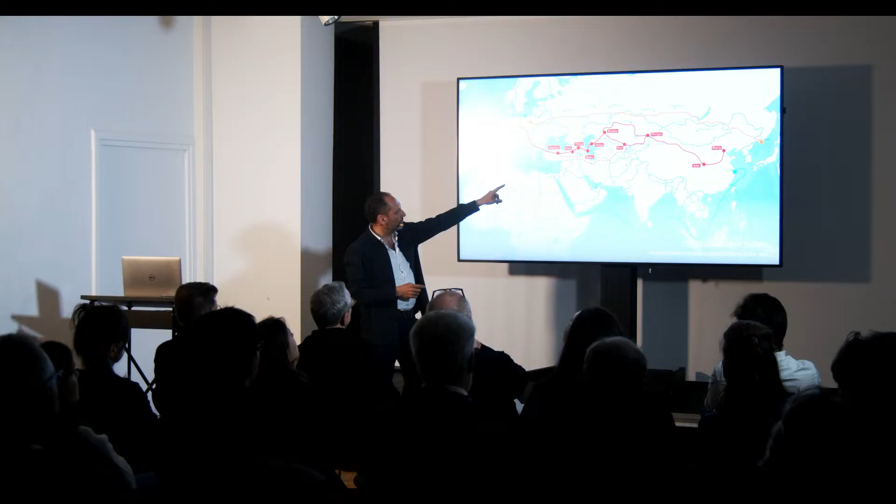If we look at other countries, China is at the moment very much focusing on the new Silk Roads, as they call it. The connections over the oceans, the little gateway at Singapore and so on. China is very much focusing on developing a new landline through China, but also through Kazakhstan, Uzbekistan, Iran, to get a landline connection from the Far East to Europe. This is a game changer. What happens is not only that some toys from China end up in Berlin, but on the way, all the cities are also connected to these two big cultural entities or areas. That's why there's so much change and economic growth at the moment.

Iran is kind of a complicated partner here, as everybody knows, but in all the other countries there's a lot of development going on. If you go there, there's Chinese tourists, Indian people who run through the streets of Almaty in Kazakhstan. It's great. These connections and the possibility for people to meet and exchange ideas and goods, that is what cities depend on.

If you look at what that means for cities, traffic, circulation and mobility issues dominate how our cities look today. In some areas, infrastructure buildings like train stations, parking lots and tram stations occupy a large chunk of the cities of today, and this will even grow. The passenger demand for Germany will double by 2050. Imagine that - the passenger demand for ICE trains, they are not punctual today, so what will happen in 2050? There's a radical new thing to be developed.

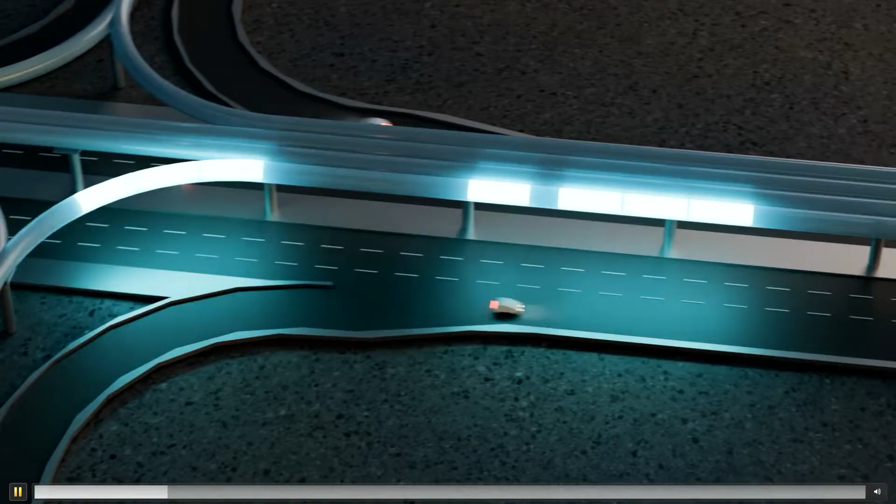So this is what these capsules at the end of the day will probably look like, but maybe more interesting is for you to understand how it works. We've done a little movie to explain how the system works, because it's based on single capsules that you board somewhere where you are. Then these capsules find their train at some node locations, and then they speed up and run super fast.

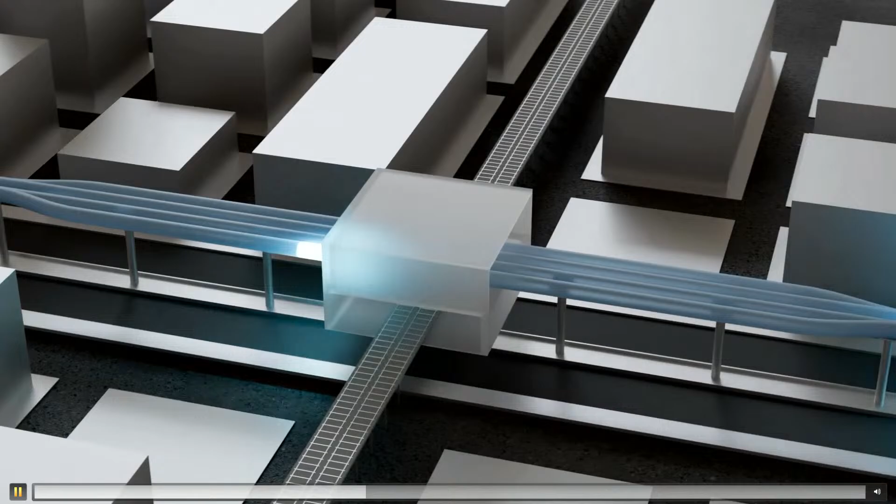The next question, of course, is how do you get off the train? Because people have different destinations, one of these capsules will slow down and take a detour, and you can get off and switch to other modes of transportation. So that's the whole system - it's based on never-ending, always-running trains that you hook onto or detach from while driving.

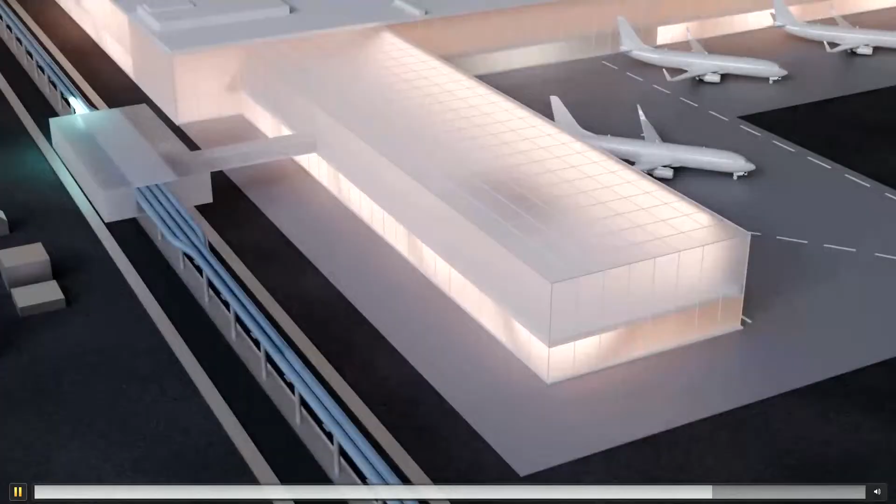We're also studying what's going to happen around a station where you stop - of course the real estate value goes up, and new possibilities for development of suburbs and cities grow all around these stops along the way. At the end of the day, this might be the most appropriate way to connect fast flight connections, the long haul flights, to local transport, and to connect even cities that are not very well connected to airports, also to the flight networks of the future.

So what we're doing right now is trying to help the technicians think about the atmosphere and these locations where you board, and how they're connected to other modes of transportation. But one aspect here is interesting - we're looking at the third dimension of mobility. That's why I was so interested in the last group that presented. I very much believe in the third dimension, as humanity has already discovered the subway, so the connections in the ground.

That's the third dimension down, but the third dimension up has only been celebrated by Wuppertal and some other few locations on this planet. And I think we need to address that.

One company that does that is Volocopter. Maybe you have heard of them. They are one of six competitors trying to come up with taxi drones, electric vehicles transporting two people at a time, super silent and easy, hovering in space. In the first place probably mostly emergency connections and touristic uses, but in the future this little vehicle will replace all the super noisy, loud, dirty helicopter traffic in the big metropolises of the world. So the question is, how do you enter these?

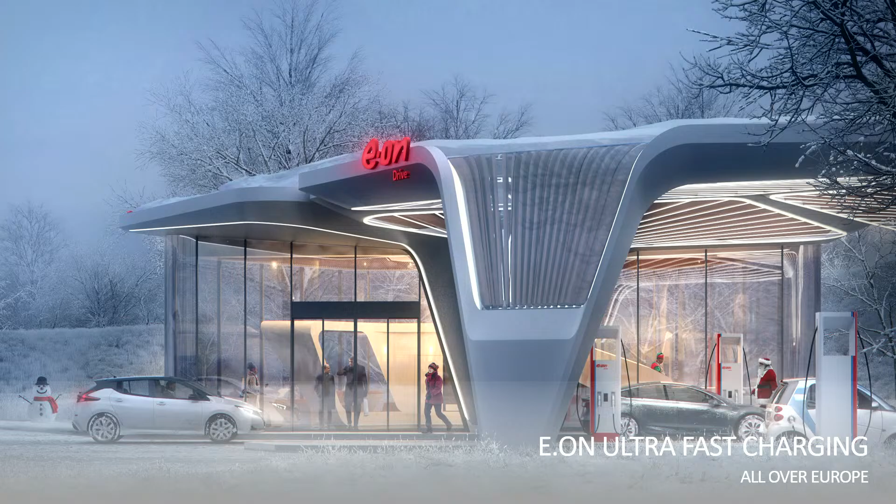These are the first designs for the fast, ultra-fast charging stations of E.ON that we did quite some time ago. Some architecture for Volkswagen in Wolfsburg, where people pick up the car they bought, where Volkswagen staff explains how to use the car and so on.

So, locations of transition. I've also included some projects by other people to underline and explain what I'm talking about. This is a project most of you know from Ingenhoven, with so much criticism and skyrocketing costs. But at the end of the day, similar to the Elbphilharmonie, people will be fascinated by the fact that places we long thought would be just functional spaces where you get off the train could be fascinating spaces and fascinating pieces of architecture.

And if you look at other cultures, it's crazy what's going on in Saudi Arabia. It's crazy what Hadid, our friends from Hadid Studio in London, are providing at the moment. It's just proof that architecture for mobility, for the way we move in space, is becoming more and more important.

And we were lucky to find Max Bögl, a big company focusing on prefab concrete elements, but also very much on street construction and bridge construction all over Europe, a big construction company. They were part of a big consortium to develop a high-speed magnetic train some time ago here in the north, in the Emsland.

That experiment stopped, and Max Bögl was the only company that insisted on continuing and pursuing the same idea. They have now been working 15 years on coming up with a magnetic train concept with a super holistic approach.

The company is providing 12-meter long pieces of tracks with the magnetic technology incorporated. They will be providing all the stations. They are also supplying the cabins, the wagons, the train itself, and also the operation for a system like this. So if you go to Max Bögl in the future, compare to what the Deutsche Bahn is doing, where you have one company that's doing the ground, and the next company is building the tracks, and the next company is providing the trains, and the next company is doing the operation, which makes it super complicated.

And the result was not only the track design, but also, of course, the stations made out of modular components, biomorphic kind of design, because we believe that this is very much representing new modes of transportation or ways we move in space. And it's all modular, can be prefabricated and brought to the site and implemented super fast. So if building a train like this takes only a third of the time of a subway, it only costs a third of a subway.

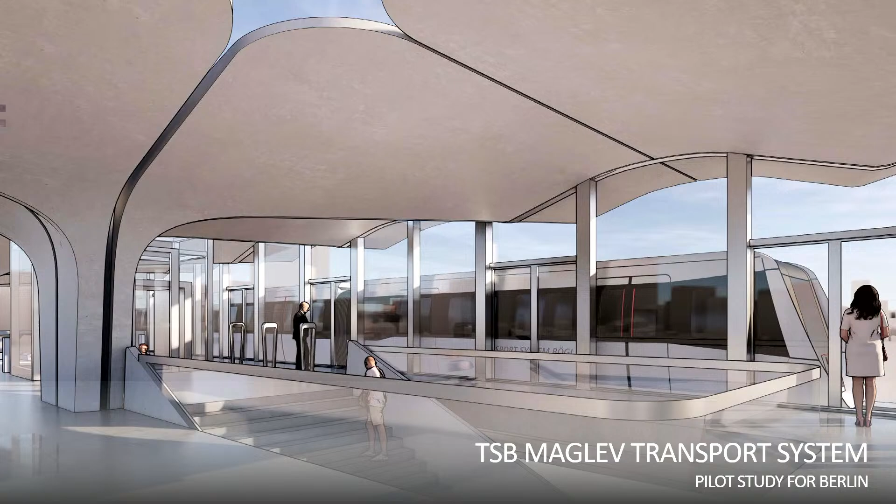I sound like a marketing guy, right, talking about these things. Okay, let's go to the design. So we tried to show how it would look in the urban space, and I think these drawings show very well that it can be easily implemented in the urban fabric and urban spaces.

For me, it was super fascinating to really focus also on the engineering part. So we needed to come up with an intelligent solution for the need to adjust to all kinds of angles of the track in the curves at different locations. And at the same time, the two tracks needed to be adjusted in height to always provide a horizontal emergency track in the middle.

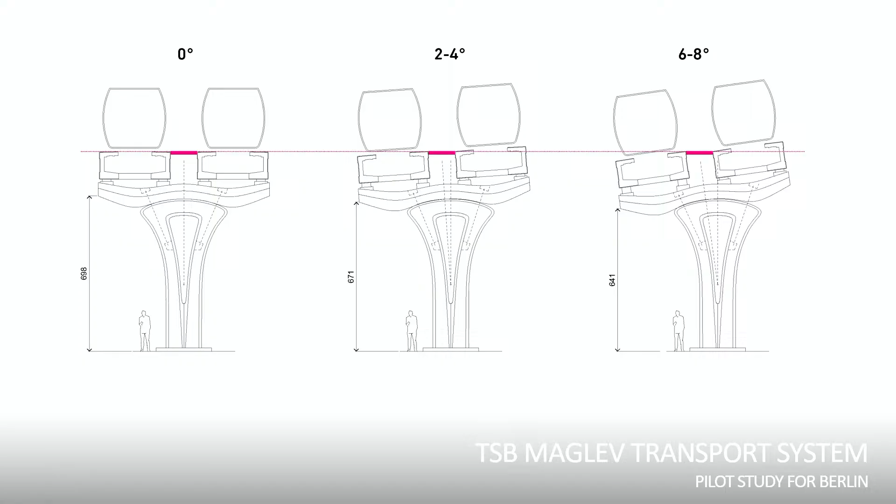That's why we came up with this interim layer that sits on a pillar, on a column, but allows the whole thing to turn slightly to adjust to all these necessities. And of course, that works very much like some areas in our bodies, how some bones work in our system.

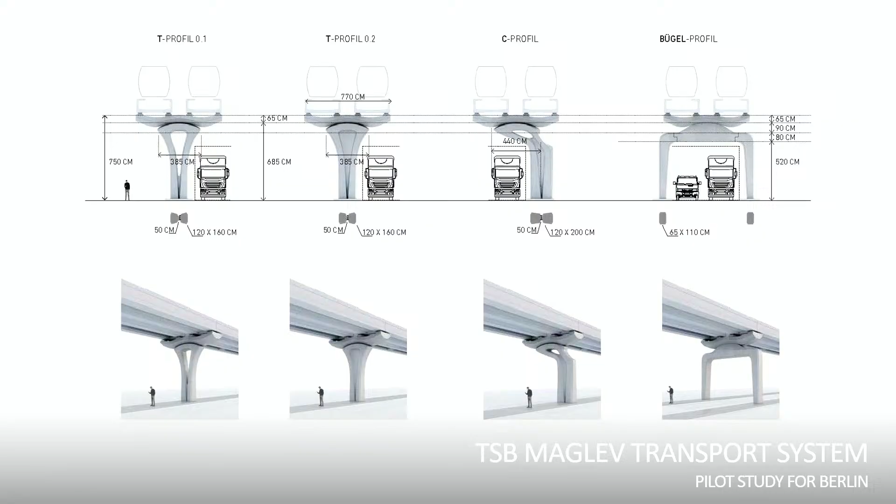And then we had to come up with all these different solutions for different site conditions, like cantilevering parts, bridging, subconstructions, and so on. But even more important was at that point also to show how the system would look within an urban environment, like a typical Berlin road, for example. So you see how these columns can react to different site conditions.

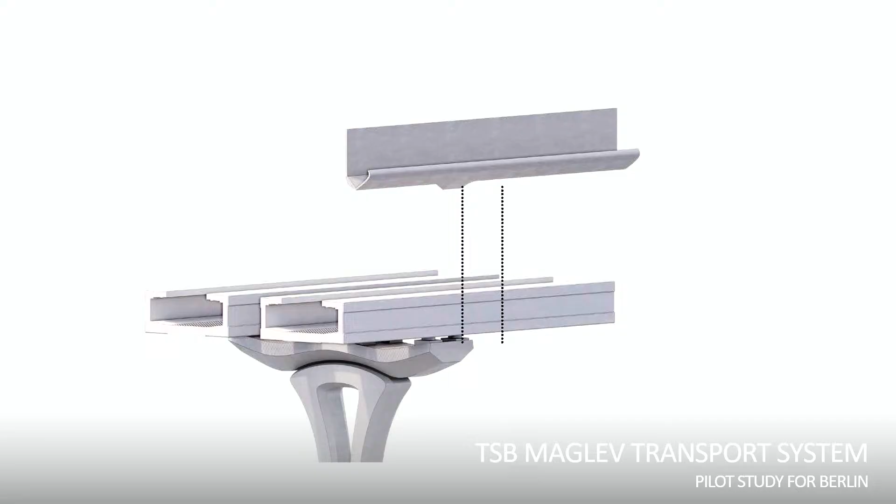In addition to the structural and engineering intelligence, we also thought there should be some additional element to the tracks, so it doesn't look just technical, so it can be of different value also for the urban space. So one idea is to combine it with solar panels, photovoltaic area that generates the energy that the train needs to run.

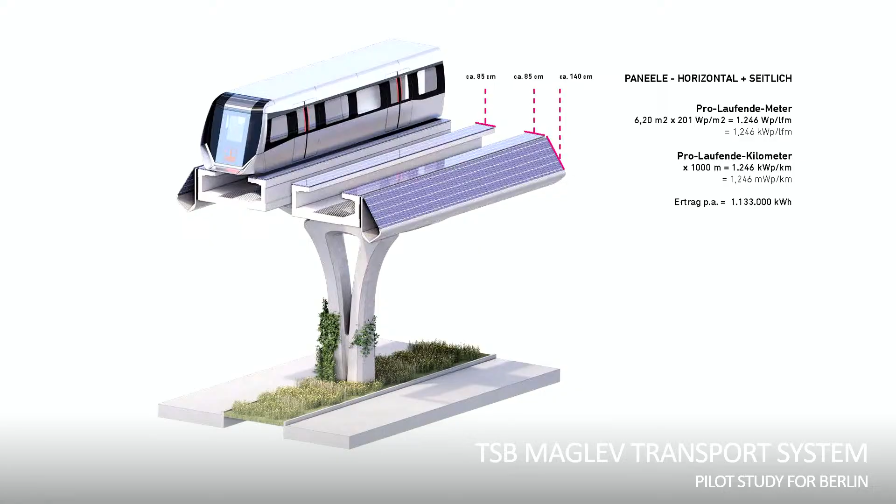And believe it or not, we did the math and calculated that the surface, if cladded like this, would help us generate nearly 50% of the energy that the train is using for its operation, which is crazy because it's a synergetic aspect that your track and your mobility coach, the train and the tracks, are at the same time a little power plant that reduces the amount of energy that you need to bring into the city from networks or power plants.

At the same time, a second idea was to also provide some body of earth to allow plants to grow along the tracks, to allow for a green element that is not only nice in the urban space, but also to collect the water, to store the water, and to cool down the space.

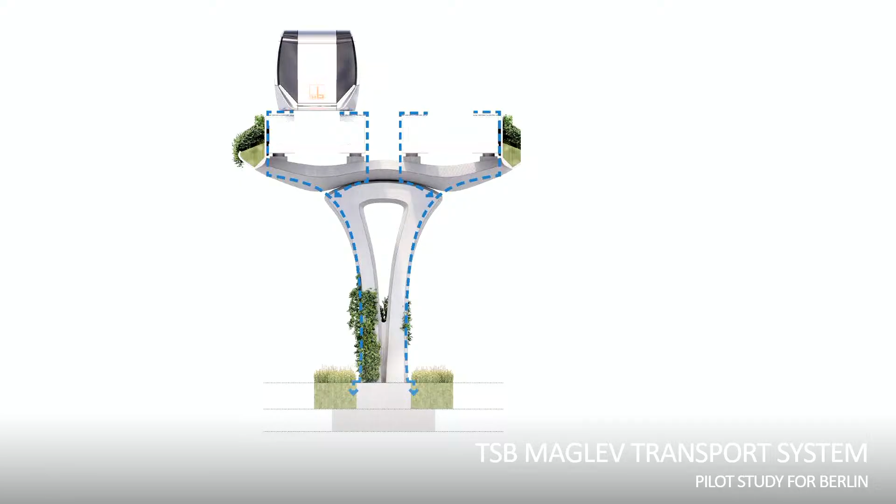So we came up with some strategy to collect the water and make it run down into the ground. Of course, if you lift up tracks like this, you free up a lot of space on the ground, and so you can allow a sponge city, that somebody talked about today, to also arrive in the middle of our circulation areas. But at the same time, of course, to keep some water up in the air to cool down the space below.

During the year, you would see blooming cycles, and people could then decide if they would like to have more the lilac or the rose line. So that would not only be a name, but a reality.

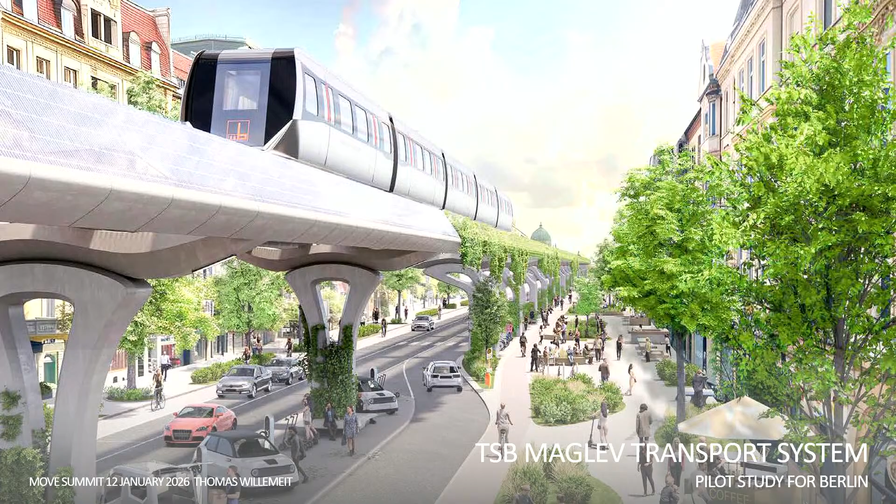But even more interesting is if you think about this in a consequent way into the future. We believe we need to look very closely and carefully at the ground, the urban public space that we have. If we free up space by inhabiting the third dimension, and by reducing individual mobility on the ground, then something like this can happen: you free up space for much greener areas, areas for kids, for people together. Going back a bit to the 60s and 70s, the idea of the city was a green city with buildings sitting in the green. But all the public space was more and more occupied by streets and parking.

So I think there is a little movie. I don't know if that works here.

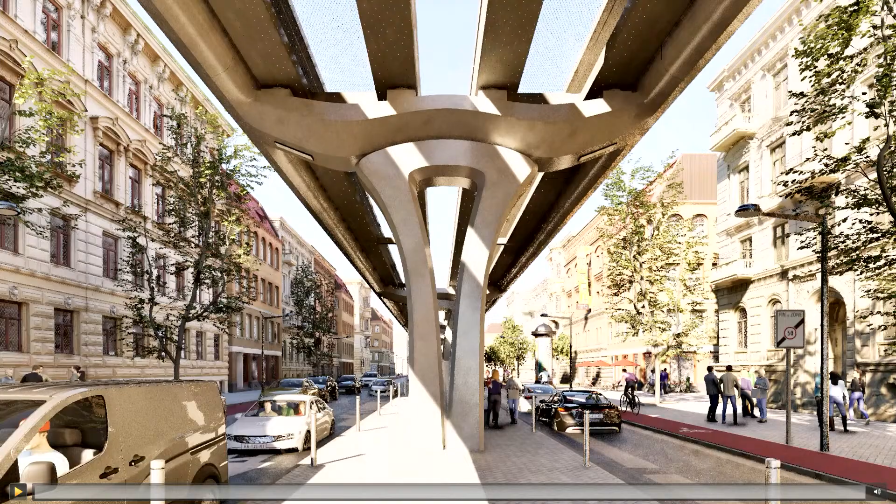Yeah, sometimes we do these movies, as you probably also do, to show how this would look in the city, to get a feeling of the dimensions in space. This is a lot higher than what we know from the S-Bahn tracks — you see this is 2 meters higher and a lot more delicate and reduced in proportion. So we think this will not only be acceptable, but a real interesting contribution to the urban space of the future.

So why do we do that? Car-to-car communication, all the technology people are thinking of, is there to reduce the space we occupy on the ground and to provide that back as public space. All over the place you see different shades and different solutions that are signs or symptoms of the same development, the same movement.

Everybody probably knows the High Line in New York. That's one of the greatest examples of how a railway track within the city, no longer in use, was transformed into a linear park that provides an alternative to just walking next to the cars on the ground. Here you have an overview of the city, and after some years this has grown into a forest. Very beautiful. So this is apparently something that everybody wants anyhow.

One project of ours, very close to Checkpoint Charlie and Potsdamer Platz here in Berlin, tries exactly that. If you've been to Berlin, you know where the Reichstag and the Brandenburg Gate are. Berlin Castle and these other Kodak viewpoints basically surround an area that is the Baroque extension to the medieval city, the so-called Frederick's city, the Friedrichstadt. The Friedrichstadt, apart from some areas destroyed in the Second World War, and the Gendarmenmarkt for example, is a very dry city. There aren't many trees. It's heating up in the summer.

So when we started to look at one block, very close to Checkpoint Charlie, we tried to bring green back into the center of the city.

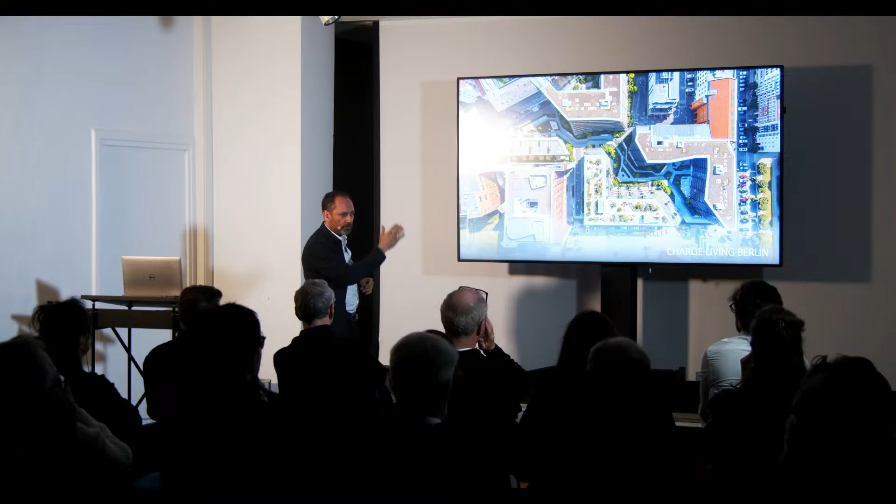On the piece of land we were asked to design around 350 apartment units for, we decided to break up the traditional way of reacting within the Friedrichstadt with very closed atrium courtyards. The one sitting right at Zimmerstraße, we broke up to allow people to go through, and light to penetrate through the block and arrive at all these numerous balconies. So the idea was to provide an alternative to the normal traditional roads and street connections, allowing people to quietly shortcut and connect areas that were separate before.

One of the main aspects is the idea of the green in here. The green is not only planted within the buildings, but we came up with a concept to allow trees to inhabit the facades. The facade folds out, alternating like levels sitting on top of each other, to allow space for plants and trees to grow. That means people have not only a little balcony, but a kind of garden with a tree in front of their apartment, and pretty much every apartment has this quality. That generated the facade.

The facade is functional as well as interesting, because the trees provide shadow, they extend the apartment to the outside, and they give something back to the people, creating an atmosphere that normally only the top floors, the penthouses, have—some space and green in front of them.

There's also a great roof garden. This photograph was taken three years after it was ready, and you see the kind of jungle growing. If you go there in the summer, I invite you to, the temperature inside goes down by at least 5-6 degrees. It's crazy how much greenery does in an urban environment like this.

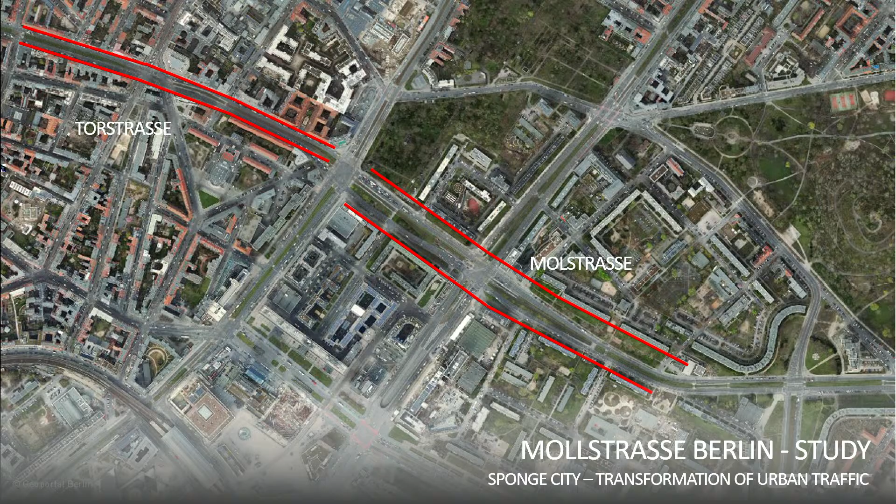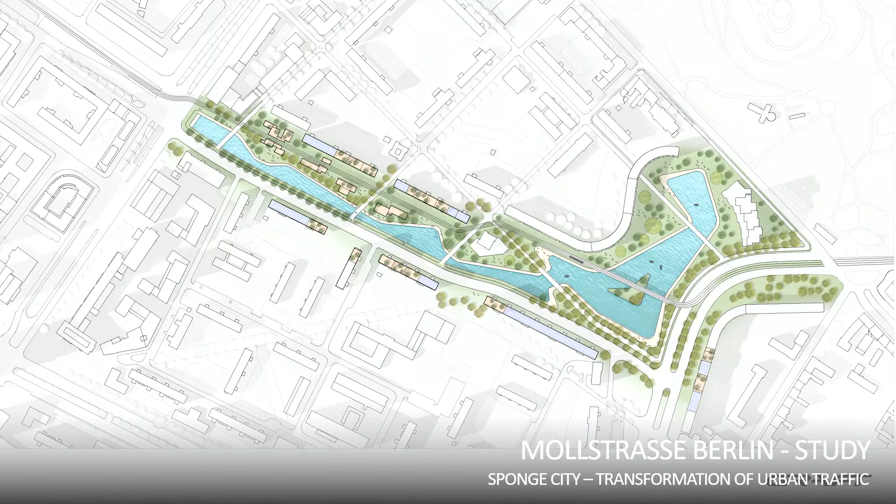It's a completely different dimension, and if you let traffic planners take the space, they just draw roads and parking and so on. We said, no, let's not do that. Let's reduce the street down to what is needed—4 lanes for traffic—and reserve all the rest for green. Of course, it's a little provocative to have big lakes in the middle of the city, but it was necessary for us to explain the idea clearly and provocatively.

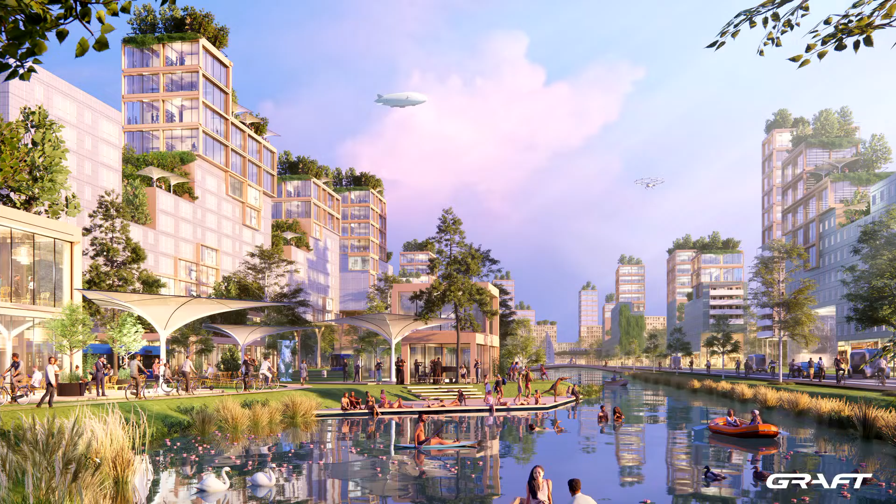This is Platz der Vereinten Nationen, formerly known as Leninplatz, with huge curved prefab buildings of a particular dimension, 10 and more stories. We said, why can't we transform this space into something like this? Why can't we clear up the space, bring in water and earth, keep the water, and create a kind of sponge city? We can still see the 10-story prefab building is still in there—we took it literally and took out some modules. It's a modular building, so you can remove modules, then build on top some lightweight wooden components and play with the dimension.

Let's get rid of the monumentality and the uniform logic of these buildings and create a more diverse appearance. I believe this is a successful approach to question whether we only keep the prefab buildings or get rid of them and replace them with blocks. We can really do a lot more with these buildings.

I found it very interesting that what we talk about today—modular production, prefab buildings, serial production, affordability, living in the green, sponge city—all this was already talked about in the 60s. We're not happy with the results, but in thinking, we're not so far away. We would now provide different solutions probably, but let's not condemn that phase. You can really live with a lot of continuity here. Yeah, modular building—super important.

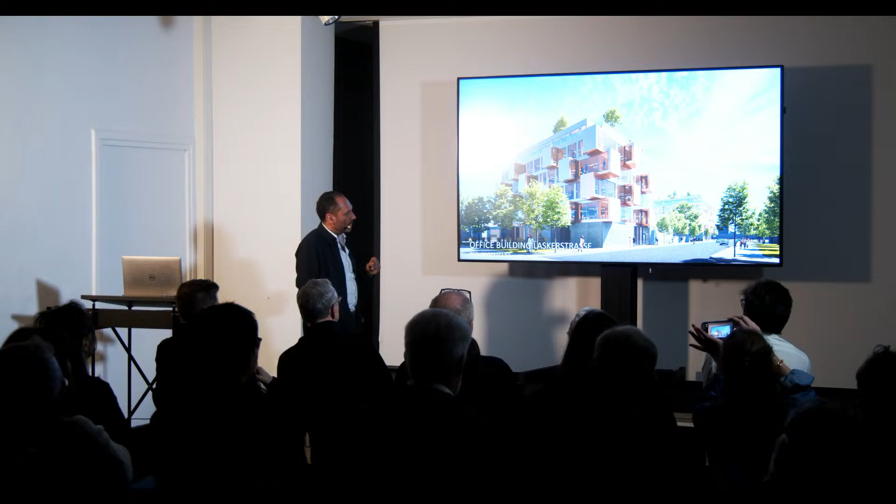Especially in the facade, a modular approach. We tried to come up with one component that could be repetitively used to structure the facade and allow some interesting experience. The idea was not to only push out a bay window or a little component, but to allow people to feel outside the building and look into both directions.

I'll explain in a minute why the rhythm is as you see it. But you've clearly discovered already that the corner position is the most interesting one, where we want to remind everybody of the traditional connections in wood construction on the corners. It reminds you there is some memory of the heritage of building with wood in general, as a metaphor. It's very simple and repetitive and rectangular, and then suddenly you have one angled corner of the site. So what do you do with that?

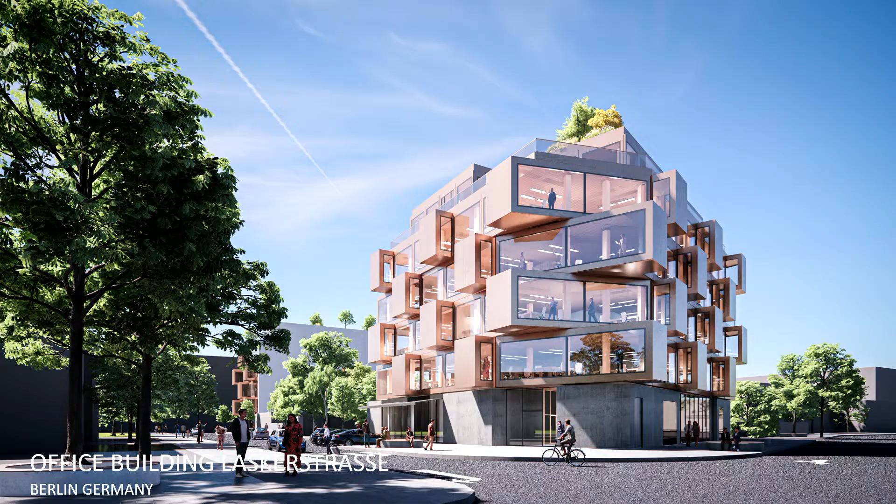So we're building a triangular core and keep the repetition also on this triangular side. But then we use the system and the logic of the facade to generate one interesting corner, where suddenly these little bay windows seem to be just the faces of larger boxes that intersect and sit on top of each other.

Of course, building with all what we need for new work environments, but what I found particularly interesting for the internal spaces is that we discovered together with a client that these little bay windows, at the end of the day, are not just jokey and funny additions to the space, but that they are the areas where people meet.

That made me think a lot about our work environments, that usually we do these open areas and the communication areas are in the middle. That's very often done—in the middle is the table where everybody meets, but also where people walk. We discovered in another project that actually the area to meet is best on the perimeter, where you're kind of getting out, putting yourself out of the office context, and you're also not disturbing anybody else, and not mixing a meeting with circulation areas. That is always also very disturbing.

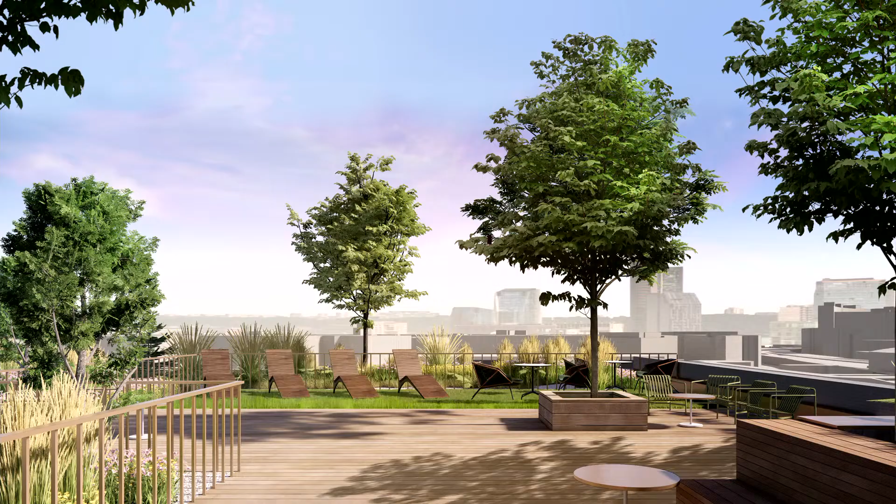So we showed how different these little bays could be inhabited and designed. And of course there's roof terraces and sunken gardens and so on—all very nice, but not really catering to the topic.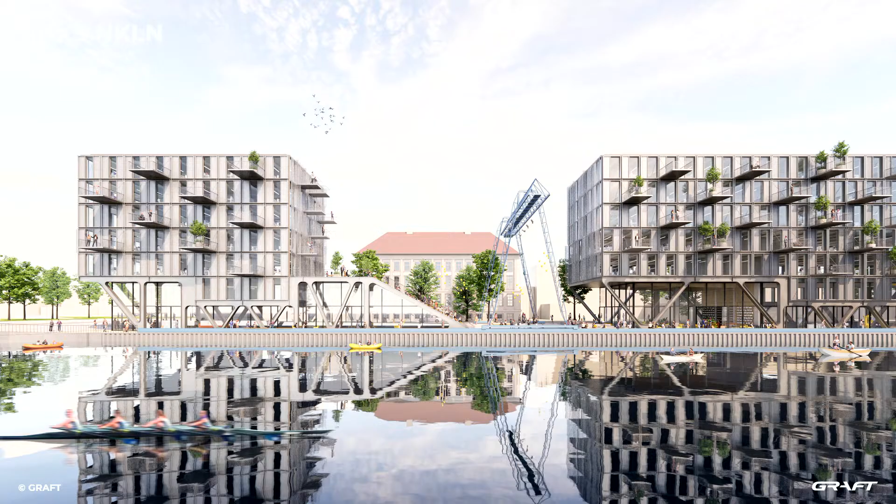One project that is commenting on this fact is a building on one of the longest sites that we ever dealt with. It's 18 meters wide but 320 meters long, along the Neuköllner Schifffahrtskanal canal in Neukölln.

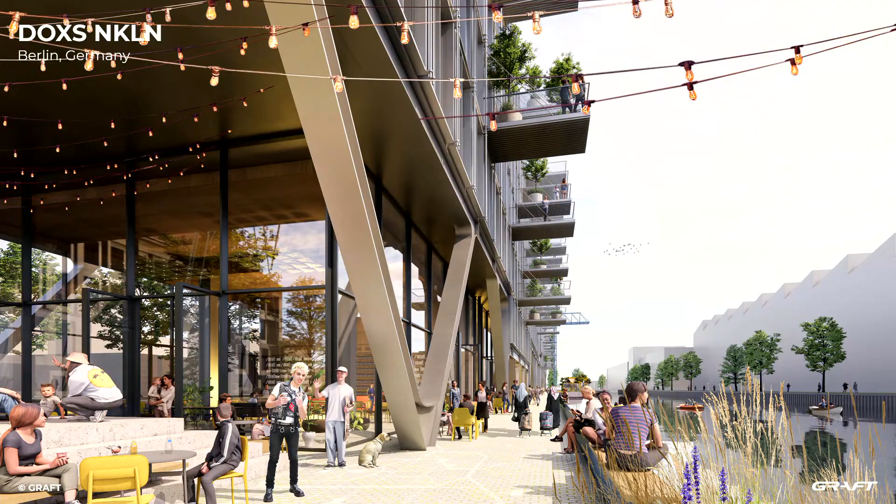We radically said, let's not hide the logic of the modular components that we're using, but lift it all up. The ground floor and the floor above are the floors that we then start to design, keeping them very open. We create something that could be seen like a bridge structure that supports all this modular construction above, allowing a lot more accessibility and providing public spaces, gastronomy, entrances to boarding houses, and so on.

Repetitive logic of balconies is also important here. Of course, a very long building needs to be interrupted with two public spaces—two courtyards that connect the streetscape behind with the waterfront promenade on this side.

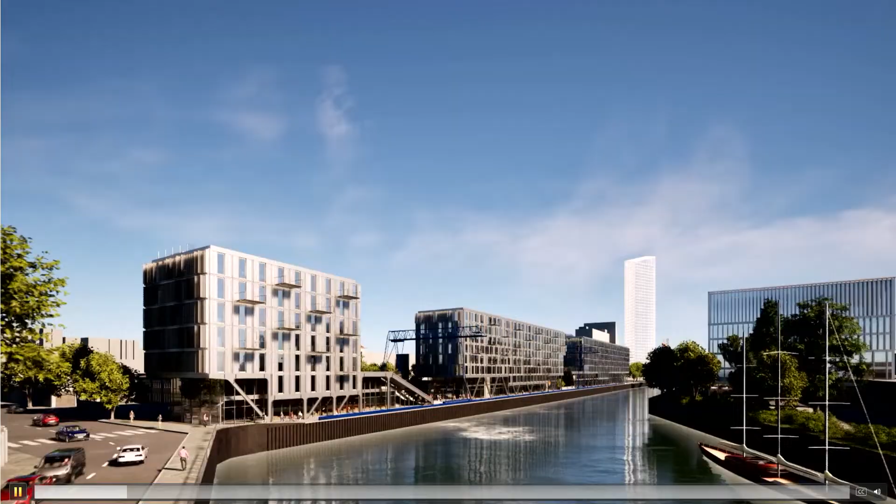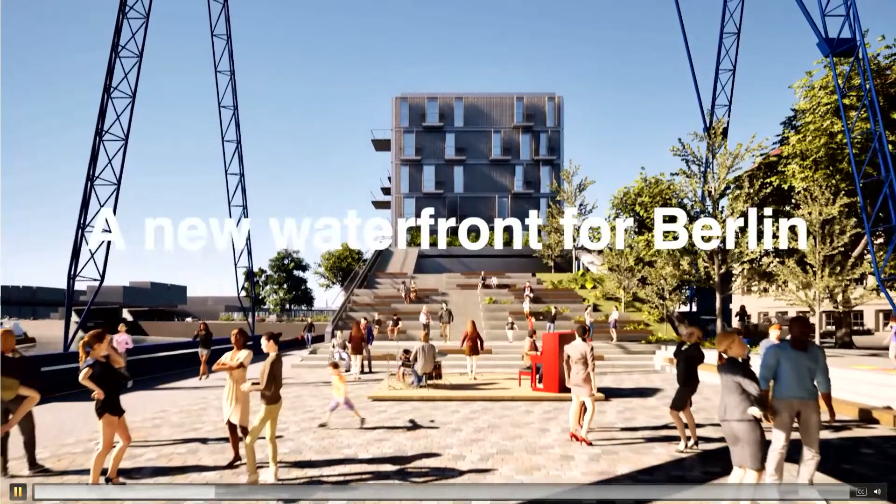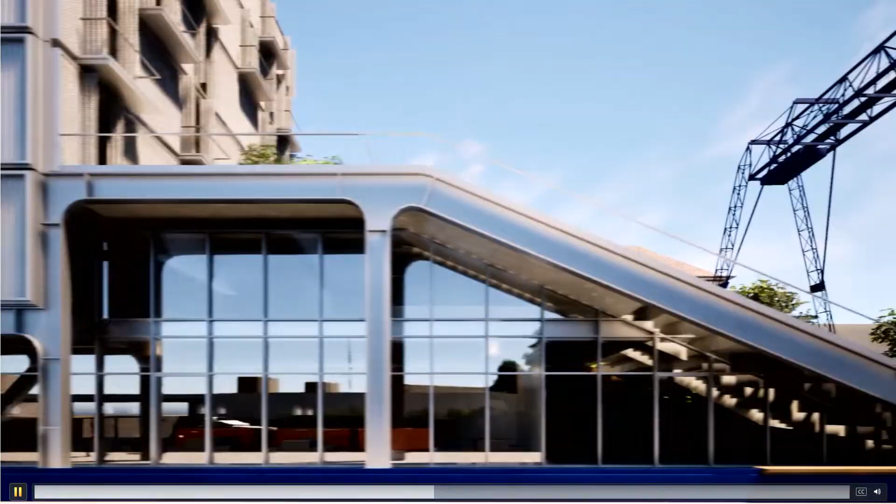There are two existing old cranes that we keep in their position. One is used for the technology to cater and support a stage, an outdoor open-air stage, and the other is going to be used as a toy—a structure for kids to run up and down. That's the idea of how we see this being constructed. Traditionally, a lot of building material in Berlin was brought into the city on the canals, so we believe this could be done here as well.

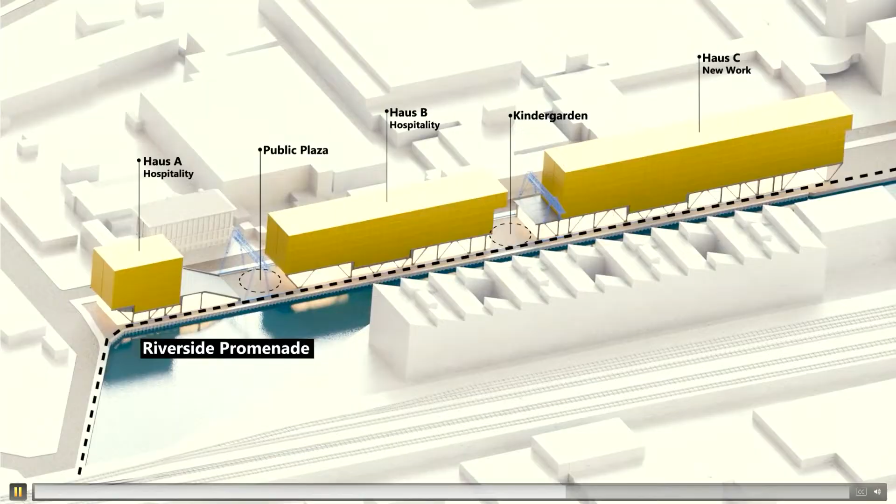So of course, numerous arguments for using that modular construction. You see these beams sitting on the ground, and then the repetitive logic of the container sitting on top. This is all prefabricated, but in a way that we try to start learning how in the future we could deal with the logic of these modules.

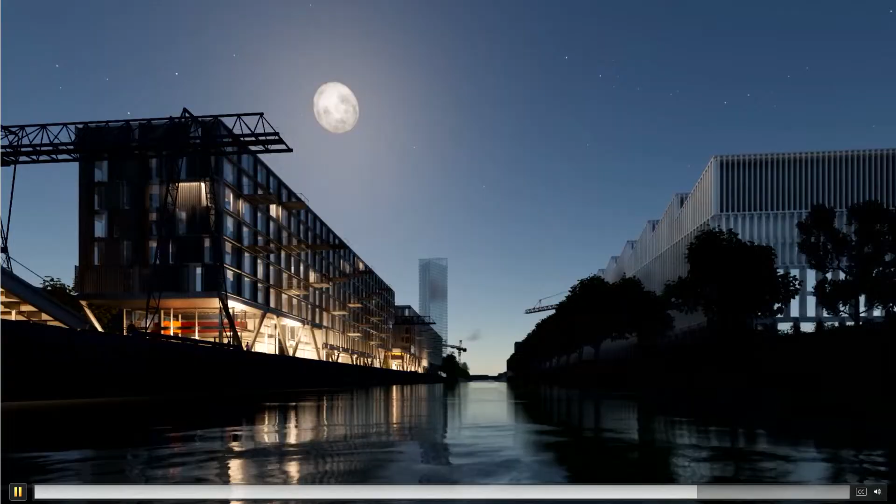Another adventure we stepped into was with a developer friend from Los Angeles, Jana Mrowetz, who we've known for like 25 years. She came to the office and said she's done with normal developments, and she would like to develop a modular community idea.

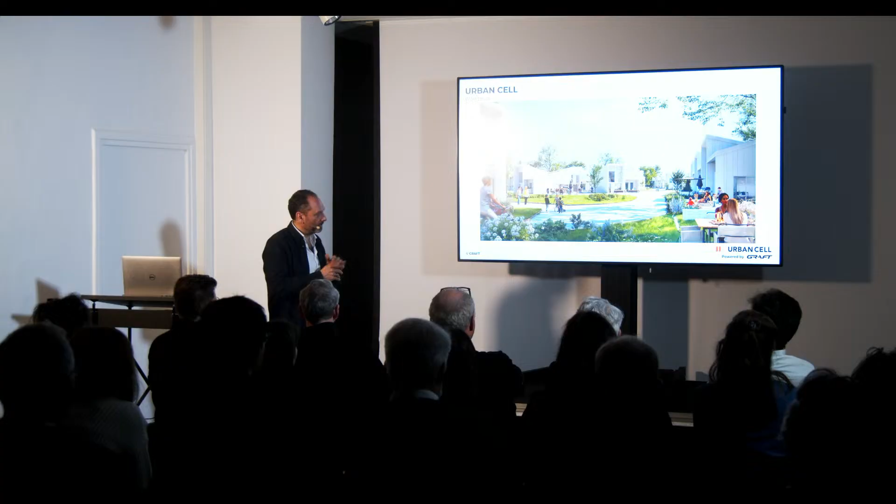That was a little bit fuzzy in the beginning, but we then said it's such an interesting idea, like a densified suburb maybe that could be located at the perimeter of the cities, or it could also be communities somewhere in Brandenburg. So it was an interesting structure because we focused not on modular design, but on how communities work. We could maybe all agree on reducing our private space if at the same time we win large communal areas and some quality space. For example, one of the first ideas was 30 or 40 families living together, and they would be able to finance a little spa with a pool.

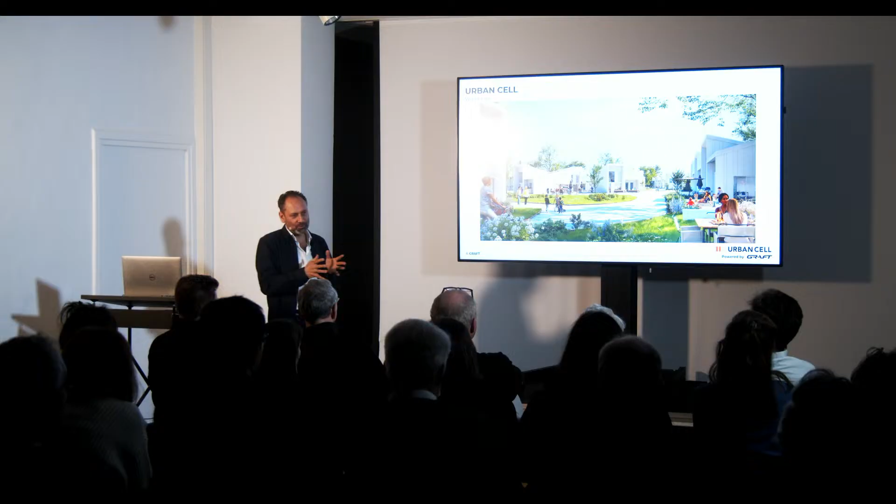So who would not move into such a community? If it's affordable, we would probably be ready to reduce our private space and gain some communal areas. So the idea was, let's come up with a module that allows for tiny houses, but also for the construction of communal co-living, co-working areas.

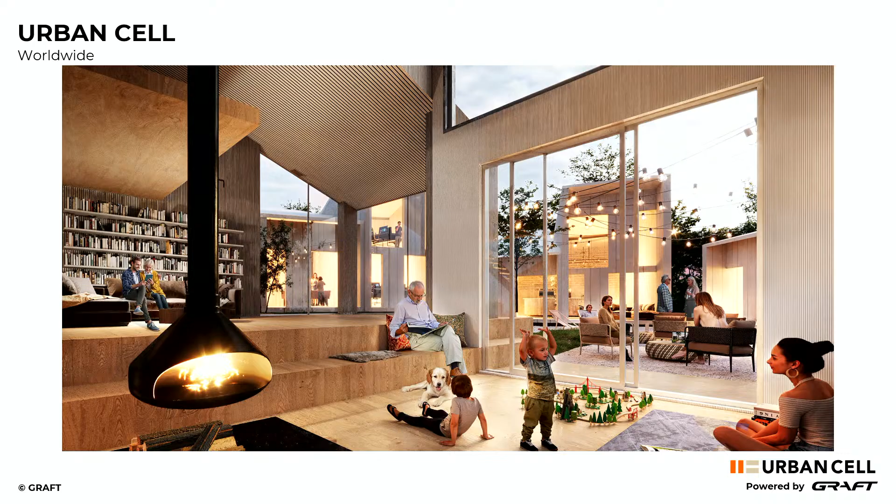So you will see the module in a bit. You see a house made out of 2 modules in the back, but these modules are developed in a way that they can be combined into larger units, into these living areas.

Let's run through another little presentation. The company that we founded is called Urban Cell, and we're also part of this company. That's something that we sometimes do, that we found companies like Solar Kiosk and stuff. It's a little crazy.

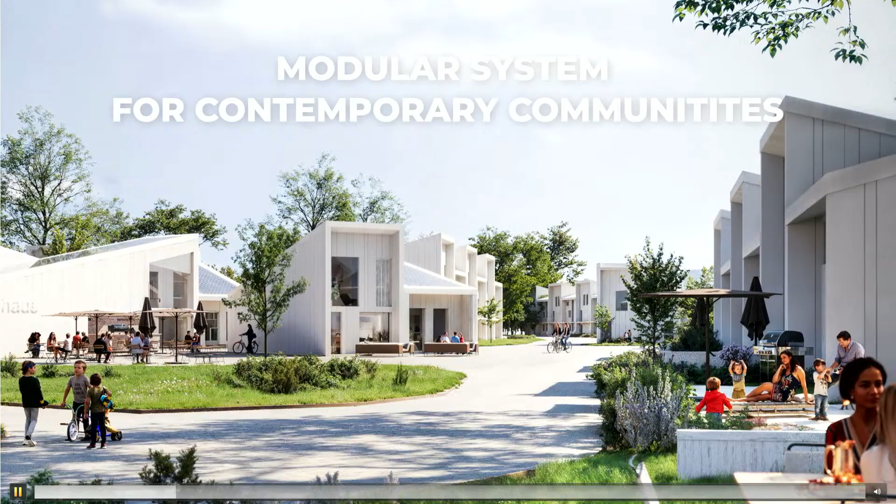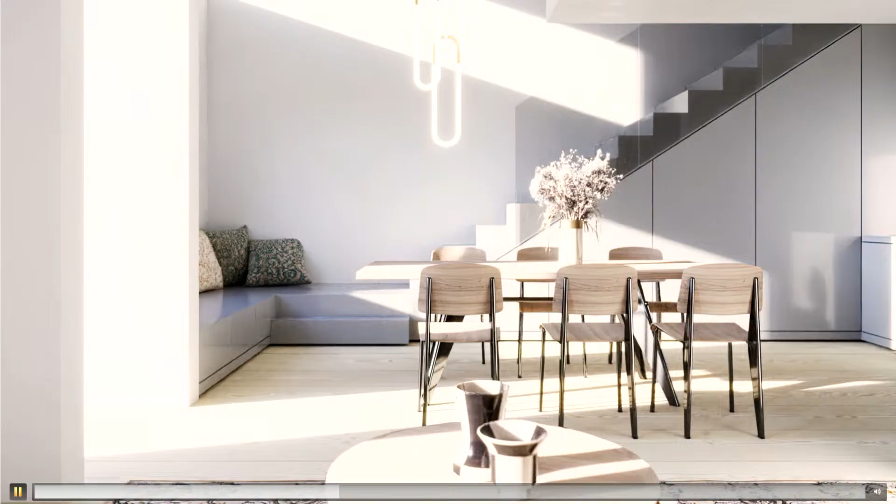But these modules consist of 2 boxes, only that the top box has a pitched roof, so it doesn't look like a container. It looks like a conventional house, and they can be combined in different directions. It's basically a house with an upper bedroom. So down there you have a living kitchen unit and a bathroom, and all the technical components are combined in one wall.

It's super easy, and then of course the idea is that you can combine them into larger units, larger houses, community houses, and so on, and of course also into little spa components.

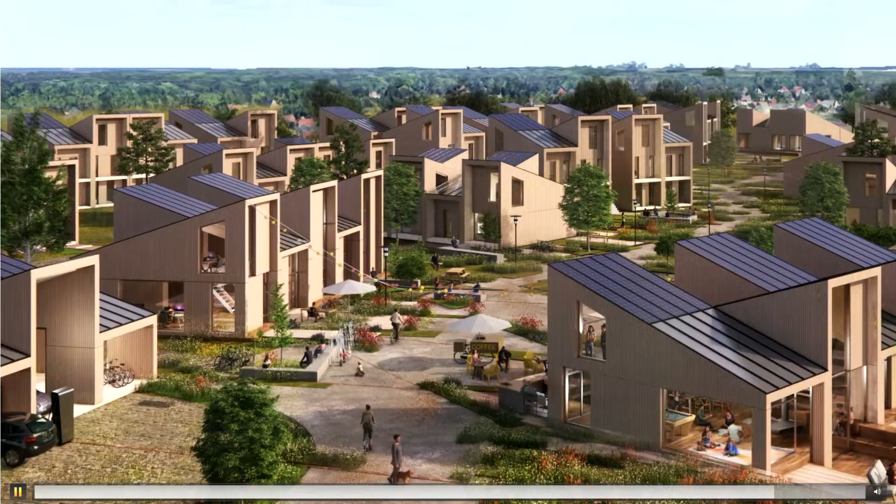This is something we have been looking for investors for, and suddenly there's a possibility coming up in Portugal. So we're building the first community now in Aljezur with a manufacturer close to Porto. We're building the first prototype right now, so it will be placed there in 2 months, and then we see how much we need to learn, and then build the first little community.

In this case, for digital nomads, people who live there for quite some time during the year, and then of course also need some spaces to sit together and meet other people. So specialists like in computing that focus on their work during the day. They go surfing, of course, but also need to see some other people.

But from the communities, the suburban communities, more into the urban environments. Also, this project is also very modular, doesn't look like it on the first sight, but it's also developed out of a modular strategy. It's the first project that I would like to use to explain how much we also need to look at transformation of our urban spaces. It's not only about coming up with new architectural ideas that we place somewhere there's some space left, but we also need to transform the existing much more intelligently than we did in the past.

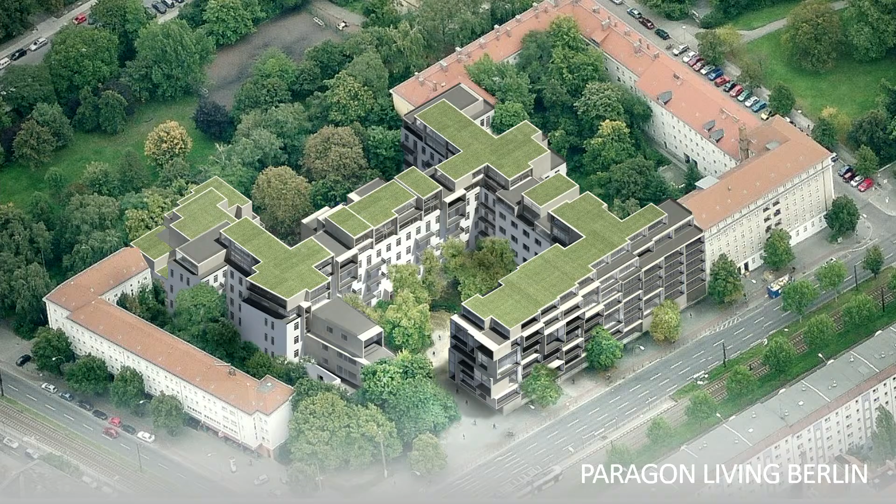Some more intelligence to the floor plans, but these boxes inspired then also the approach for new additions at the street front and also in the back, consisting of always the same modular unit, also with balconies of different depth. So some of these balconies or loggias are longer, some are shorter, and that's why it looks like some boxes are shifting.

But in fact, the thermal facade is just in one line, in one flat plane, which makes it very simple and easy.

Also some interesting idea for how to deal with an old building. We had huge hallways, big staircases, a lot of space that could not be used. We came up with the idea to keep these hallways only on the ground floor and give access to some cores that go up to the upper floors to reach smaller hallways and occupy some parts of the hallway with bedrooms. So we pushed and boosted the efficiency of the building quite a bit, which suddenly made it possible.

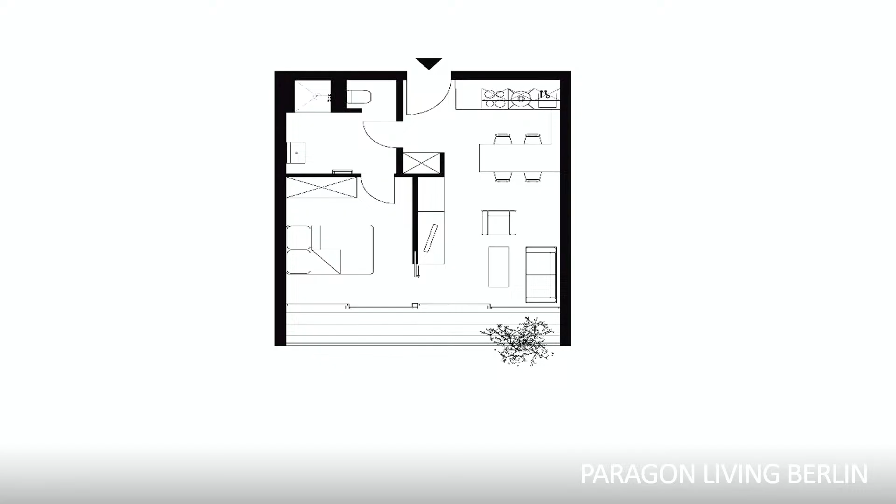But it was also the first project where we developed our Berlin apartment, as we call it. The client wanted us to design 2-room apartments with 50 to 55 square meters. And that was the first project where I said, yeah, but you also need to provide some communal areas, because your tenants will be people who just moved to Berlin, who don't know anybody. And he said, no, of course not, I lose square meters, we cannot do that.

You all know this discussion. Then I said, okay, let's see if we can shrink the apartments a little bit, keep the same quality. Can we then use these square meters to do a little bit of public areas? And he said, yeah, okay, come up with an idea. And there was a little competition in the office: how small can we do a 2-room apartment? So we ended up with 37.5 square meters at the end of the day.

That allowed us, these saved nearly 15 square meters, to do many more apartments, which made him very happy. But we also could then do very large communal areas, some community spaces, lounges, libraries, also dining areas for people to rent for a birthday party or even some official representative occasions. Also there's a cafe, biomarket, kindergarten, and so on.

Yeah, so this is a pretty complex block-filling structure. In addition here, the building, it's actually 1903, not 1907. And also in the back, one space that was left for us to fill. We pick up on the logic of the bricks.

Here, if you walk through, we wanted to open up, similar to the Checkpoint Charlie building, and allow people to walk through. Many developers close these courtyards in order to allow for a safe space in the center. I don't believe in that, so we always open up.

This is a Jewish cultural center that we designed inside one of these buildings, and then did the renovation of these buildings from '25, '26. And then also some addition in the back, where we're always playing with the logic of these balconies to kick out, and with the possibility for brick to create these very soft facades.

And you've probably seen also in the front the entrance area where the facade is kind of bending in and seems to be reacting to the visitor.

In some areas, the facade is pushed back, and you see what with parametric design you can do to bricks today. So the very solid structure of the bricks, in this case, we wanted to communicate that it seems to be reacting to the flow.

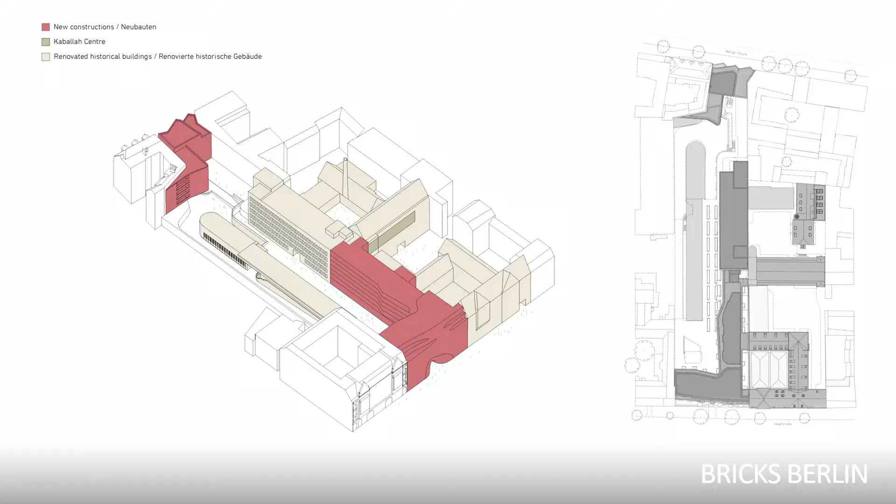Again, going back to circulation and mobility on the ground floor. That's the logic of these bricks: some panels are prefabricated and then mounted here on this location. Also in the roof, the facade is kind of bending back to react to the setback regulations of the site.

And what I like first and foremost is that the normal pushed-in logic of the facade, the negative of the windows, with this technique turns into the windows suddenly popping out as positive objects, positive components. What we call a Lochfassade suddenly turns into something completely different just by moving the facade a little bit. It's kind of interesting. Some images of the backside.

Transforming the city also means letting us transform the big icons and the big monsters of the 60s. This is what we're currently working on. I can't tell you too much about it, but I would like to show you a little bit of how we think we can save this big icon of Berlin, the International Congress Center, the ICC.

Of course, we will allow the volocopters to also land there, but to give you an idea, this has been one of the largest conference and congress centers in Europe. It has been abandoned since 2014, so nothing's happening there.

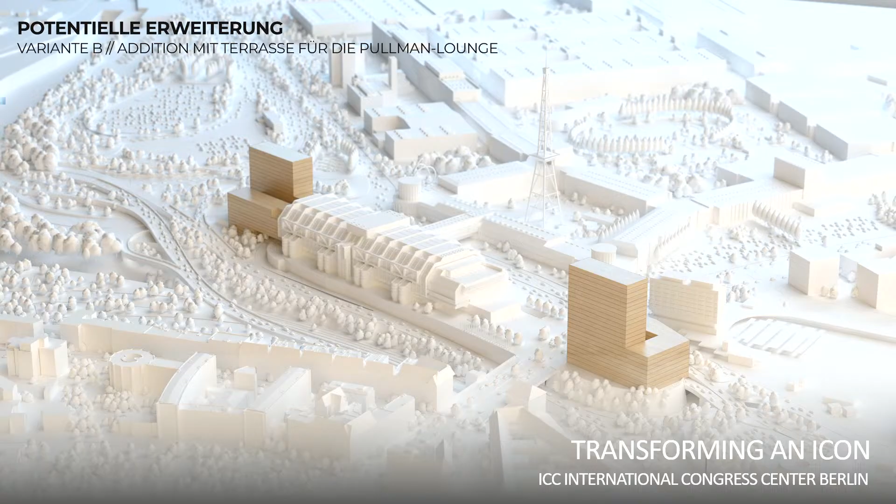We're ending with a new hotel on the southern side, and proposing a component on the other side that also looks at the ICC, so that continuous path in the middle runs through and connects all these different connections.

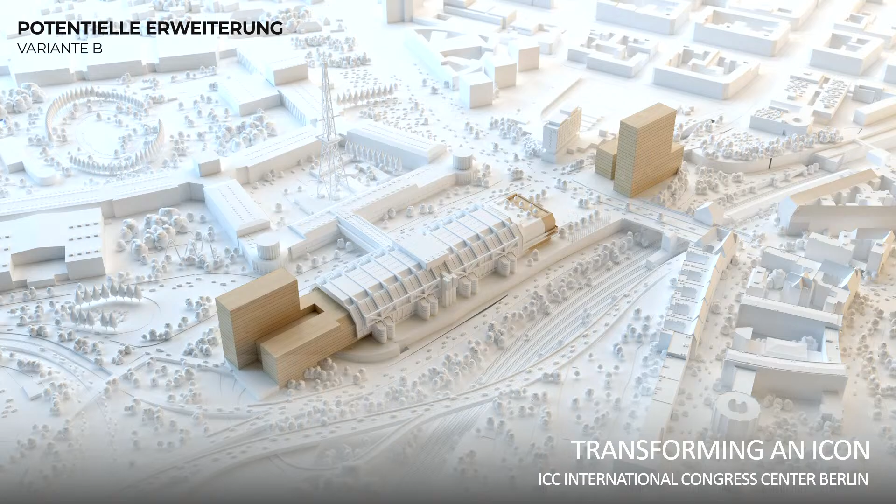We have a new junction of highways in the south, so we need a new face in the south of the ICC for these circulation areas, and we're respecting the vertical logic of the ICC.

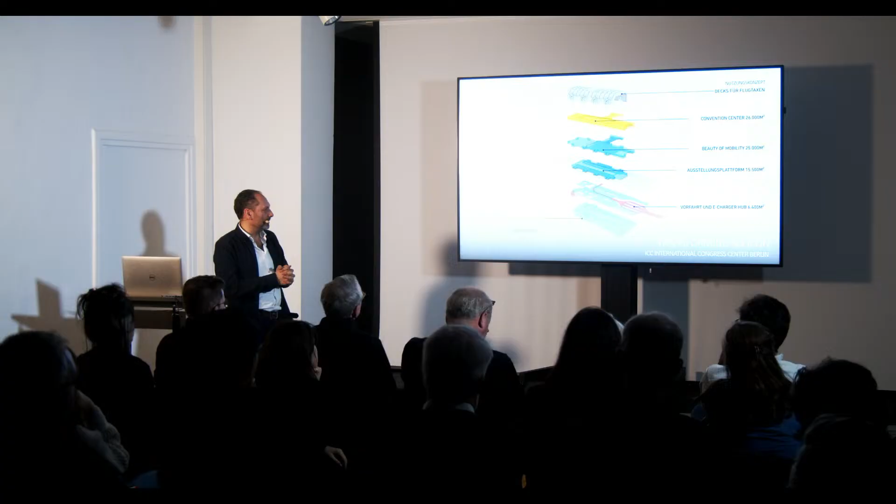The upper areas, the yellow ones, are the two big main halls you've seen in the photograph before. Below are two levels of lobbies with a particular concept for a mixed-use scenario, and something underestimated so far is that underground there's a huge area for taxis to wait and allow people to access the building and the events there, plus huge areas in the basement for technical components.

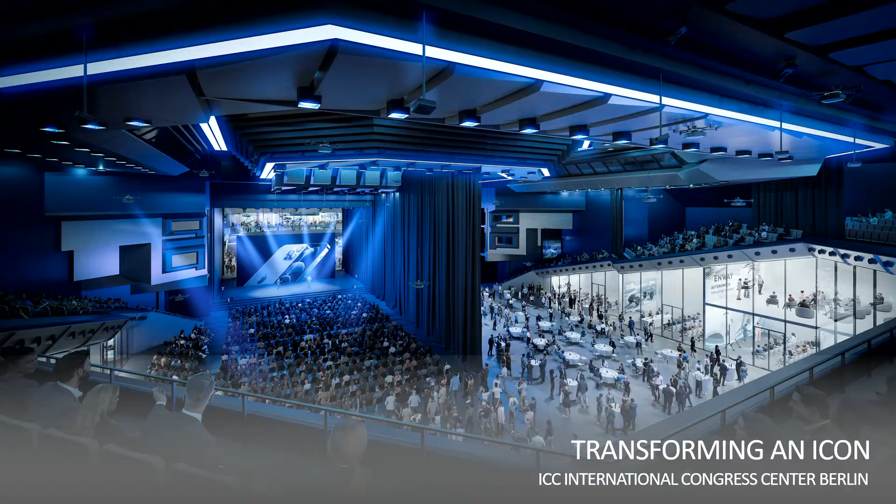So we're rethinking the main hall to make it more flexible, connecting both halls through the main stage to allow for bigger fairs to happen there. It's about 10,000 square meters of space that allows the ICC to basically become one new fair hall for the Berlin Fair. But we also have lots of ideas for the main corridors, and especially for the underground.

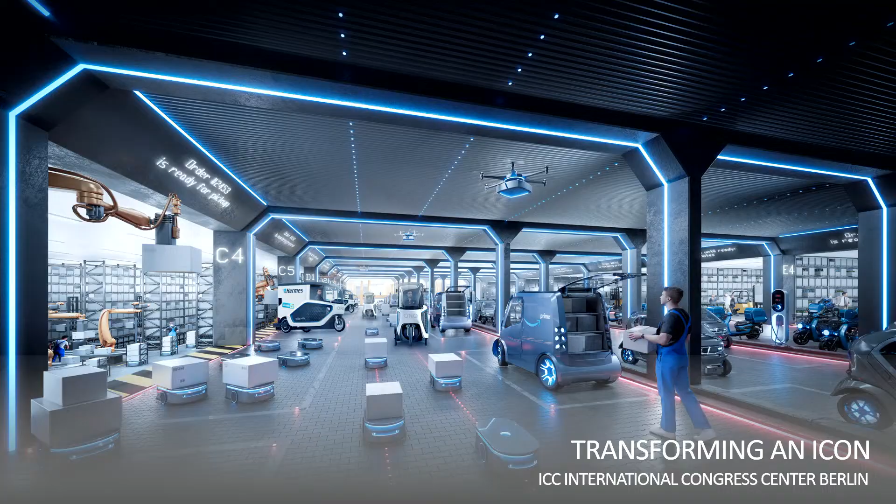As a logistic hub, as a charging facility, Berlin's largest charging facility that everybody can also go to and charge electric vehicles. So that's so far.

The last project I'd like to show you also starts with an icon from the late 60s, not in Germany, in Tbilisi, a project we've just finished the schematic design for—an existing hotel from the socialist era in the heart of the capital of Georgia. We had turned this into a hotel already 20 years ago.

Easy narrative—so we all have done this.

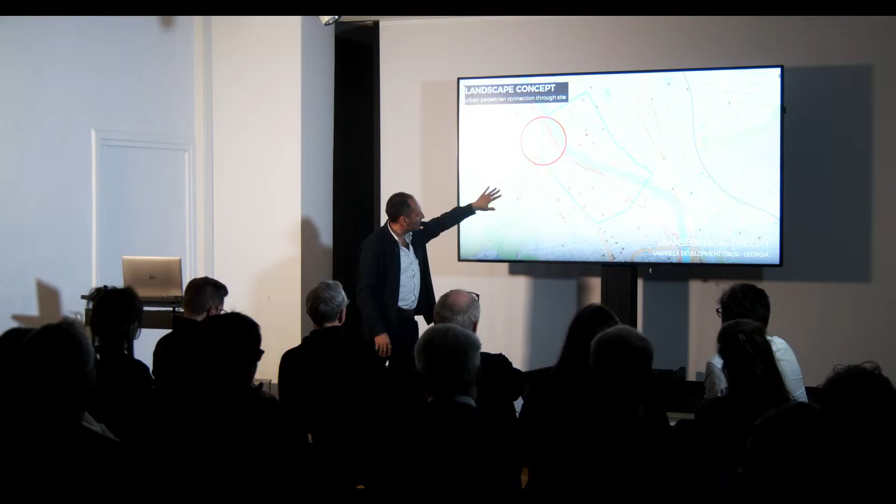What I'd like to show here is how it's positioned in the urban fabric. You have the lower area of Tbilisi, which is more a grid of a city with 5 to 7 stories, and then the other side, a very steep hill, with one main axis running through at half height, which is Rustaveli Boulevard.

So if you see on TV the demonstrations of people against the current government, then this is always here. It connects the old part of the city, Freedom Square, with the hotel square. It's a very important position in the city, 30 meters above the river, and then we have that very important bridge there.

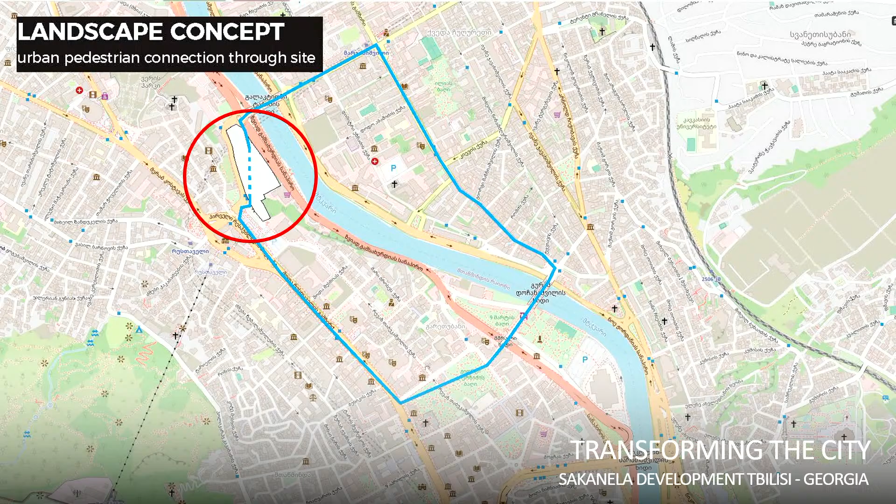You see that our site is suddenly the link between these worlds, the very famous streets and connections. And this is our proposal: one high-rise and 6 additional buildings. A very important icon here is the birthhouse of one of the most famous writers and authors in Georgia.

So we came up with a strategy to especially bring people in and allow very gentle paths up the hill to overcome these 30-meter differences for bikes and pedestrians. It's very long ramps that toss and turn all the time to make it easy for pedestrians to get from the upper, more official part of the city down into the economic center of the city.

So coming from down there, you would take some steps or an elevator to this very long ramp that leads you up to the main plaza, where our first hotel is sitting, the high-rise, surrounded by these buildings that seem to be surrounding and providing a central special plaza for this museum kind of author's birthhouse, a big long ramp that hovers on top of the main 0-level green garden.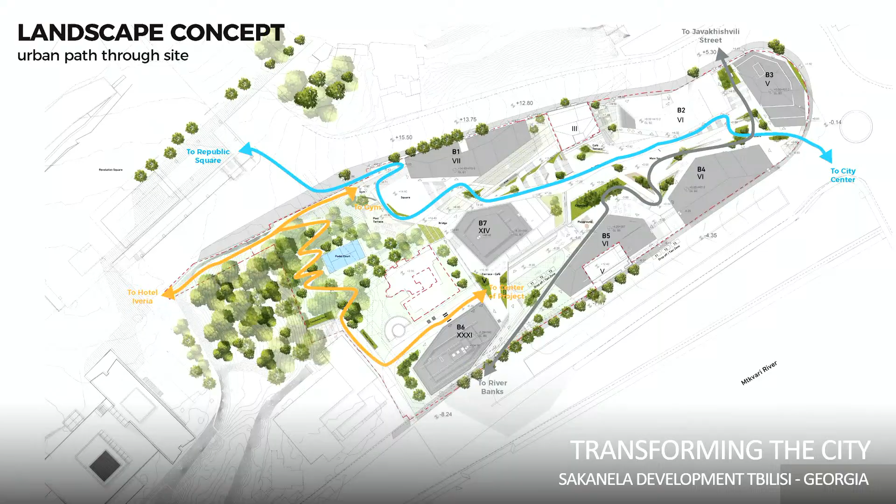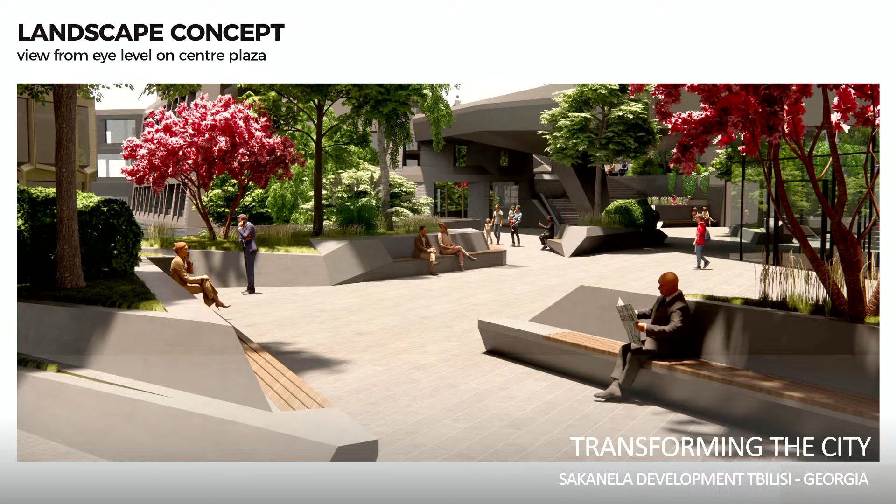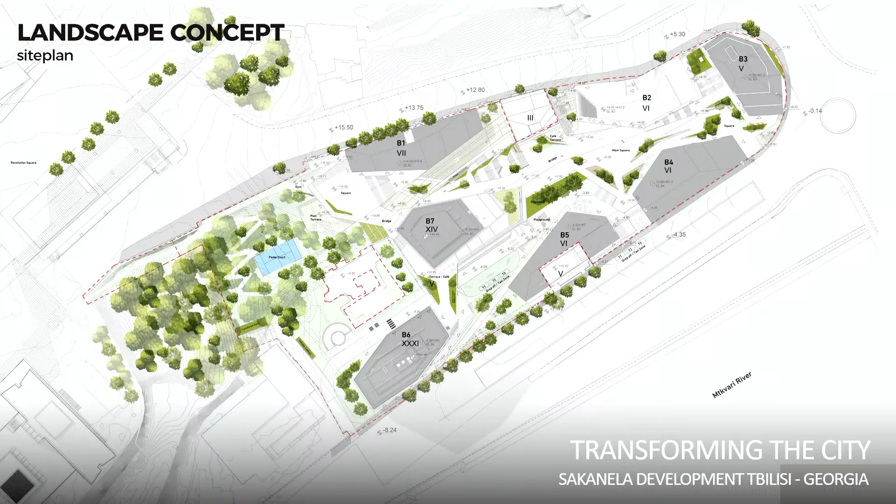So different ways to come up from the lower areas, filled with numerous program components, and again a very green main level of the inner courtyard that connects all ends and all buildings and all retail accesses. You see that already there's some sort of solid base for all these buildings and some hovering components that sit on top of each other.

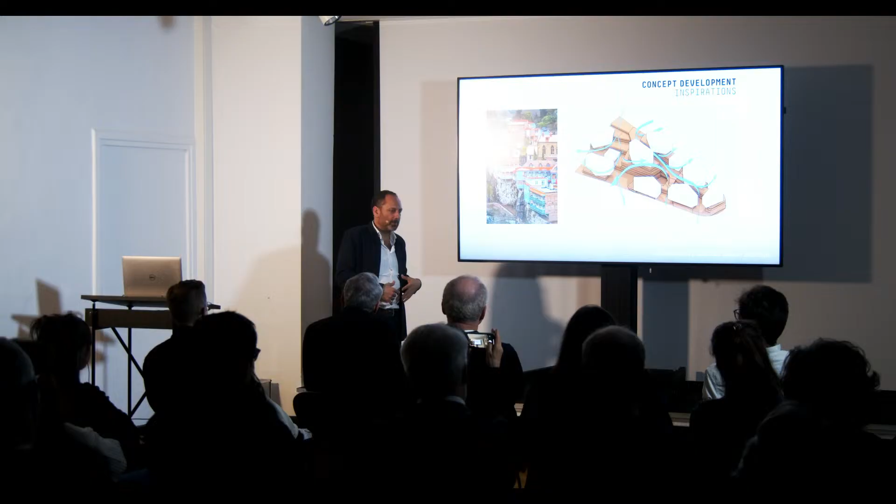Where does this come from? This is an image of Tbilisi, the old part of the city. One of the most famous locations there is buildings that hover and sit on top of the rocks next to the main river. Everybody back in the days built these balconies, these loggias. It's fascinating, the whole city is full of these balconies.

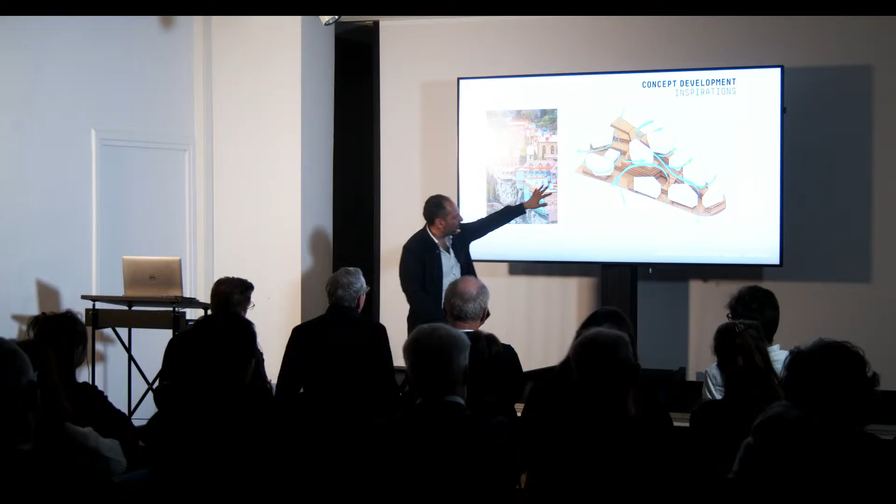So we not only took the main concept to come up with some rocky base landscape with 7 buildings sitting on top of that, but we were mostly also looking at the facades. We have hundreds of these photographs and fed them into our AI program, then tried to use AI to analyze the DNA of the historical facades for us.

And then combine that with our design strategy. It was always twofold and then intertwined, that we did a normal design process and an AI process at the same time, and they were overlapping.

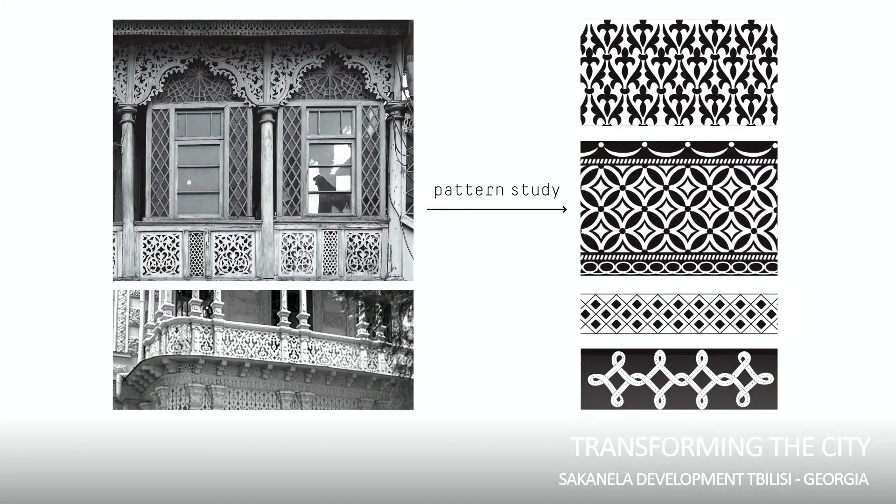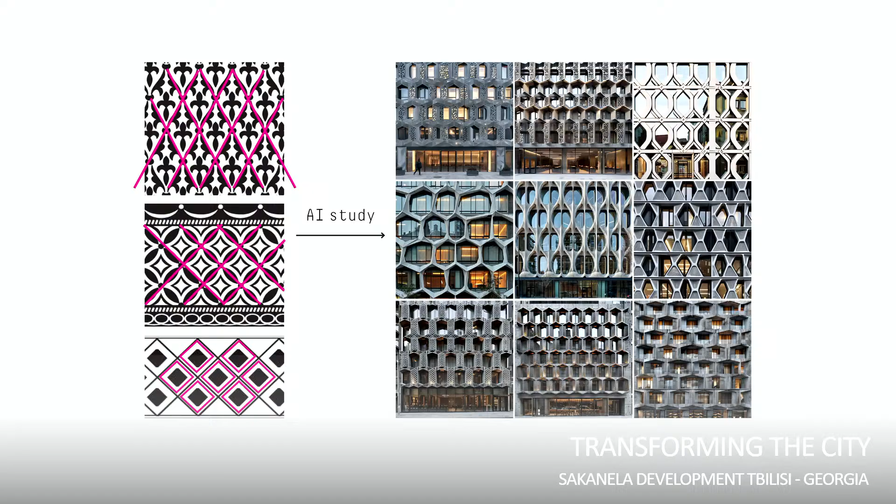So along the way, we did not only graphic analyses, but also relief structures. Some of them might remind us of some brutalist 60s, 70s architecture, especially in Georgia, also in other Central Asian countries, which is interesting, that the historical DNA the AI found was also built into the 60s architecture, which is kind of an interesting learning. But these are AI images.

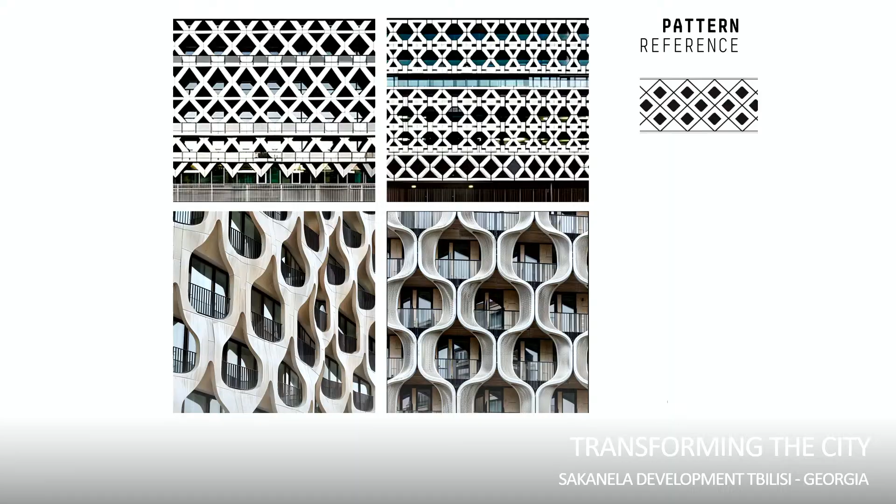So we took some detours and through going back and forth, ended up with a facade that has very much to do with the historical source it came from. This is also a three-dimensional facade with some perforated areas, a system, a hexagonal logic that is taken out of the cultural heritage of the country.

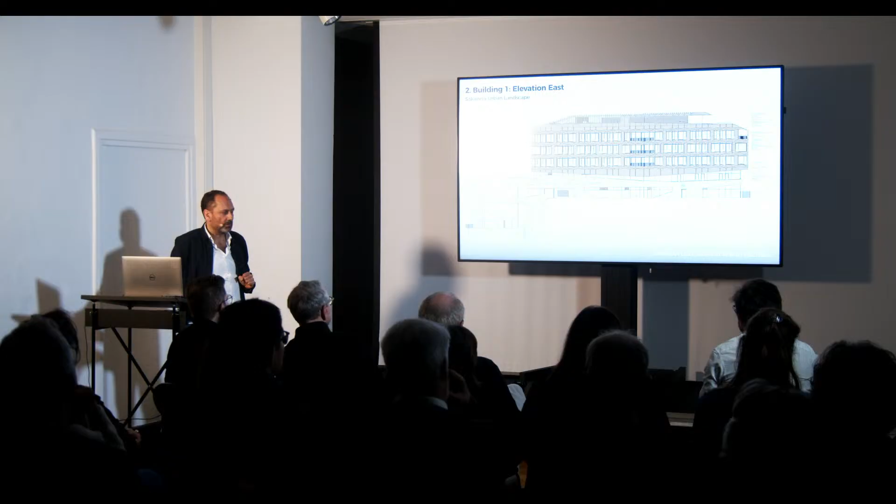You see again the rougher basalt-clad structure of that big rock extension, like a man-made artificial landscape that reminds us maybe of the rocks of the historical city center. But then the hovering buildings on top reflect and meditate a lot on the memory of the historical facades. I think if you've seen the traditional facades in Tbilisi once, you would always be reminded of that. There's a very close connection between the history and what we try to do today.

So that's the last project I wanted to show you, and a little bit of an insight on the new technologies also. But first and foremost, I think it's about the attitude and a lot of love for the locations that we look at. And there's some aspects of the cities of the future that I hope we can talk about a little bit. Thank you very much.

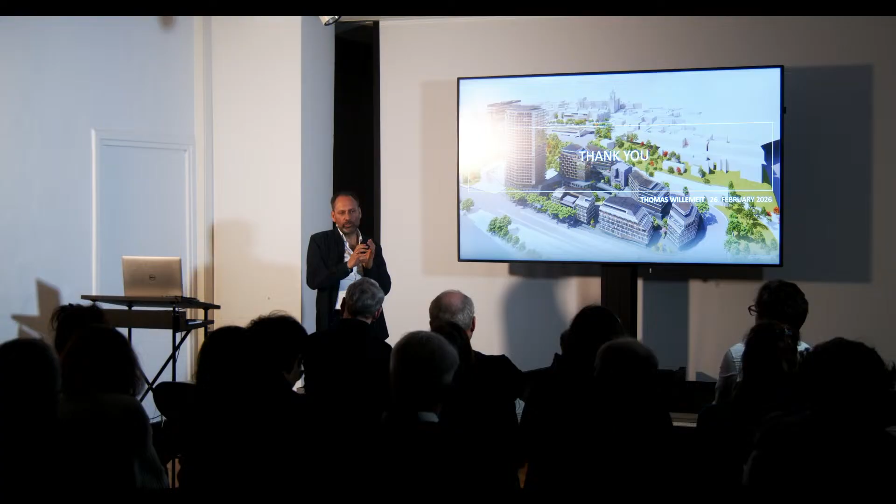And then some companies who own the technology, like Siemens, and also Bögl, because they have the technology for the tubes, which are subject to extension from temperature, and that's why the design includes some cover and shading, as you've probably seen. So there's a group of big companies contributing to the R&D of this project.

And funny enough, it's the mayor of Hamburg, Mr. Tschentscher, who has agreed to studying the connection from Hamburg to Kiel for the Olympic application. So this is one of the pilot research studies we're looking at, but at the moment it's about funding the first 800 meters, close to where you arrive with the freeway in Hamburg, the Horner Kreisel. So somewhere there should be the first piece, as far as I know.

So there are realistic discussions about funding the first pilot now. It's crazy, yeah.

There have been many proposals for trains where you can change between trains while traveling. You also showed that these capsules connect without stopping. Do you have an understanding of at which speed the connection will take place? The speed for long connections is about 500 kilometers per hour, and the joining and dejoining will happen at that speed.

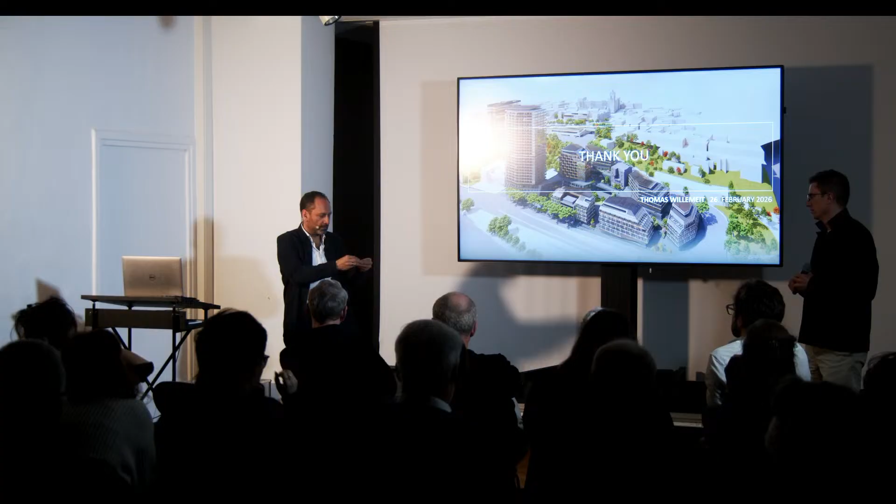The thing is, there's always the same logic: the composition of the train is done in one location. So you're booking to start from somewhere, let's say Potsdam, and you get your departure moment according to when that train is composed. You go there, and the train starts. The composition is such that the first one to detach is put in the back, then they slow down, detach, get off the main track, and connect to an airport or stop or whatever.